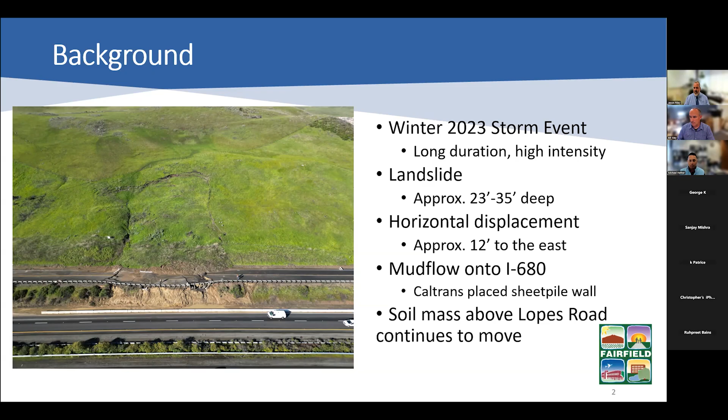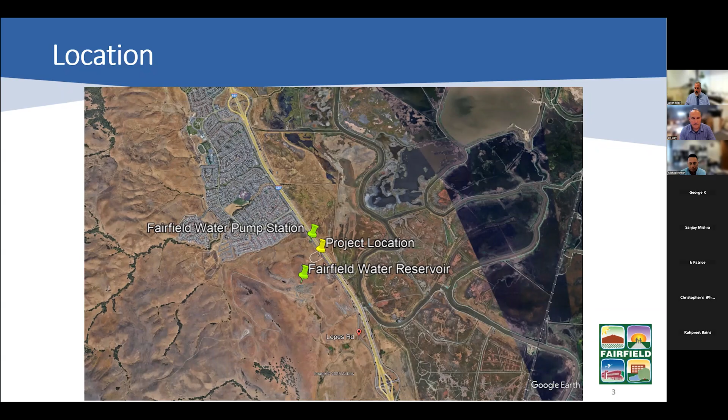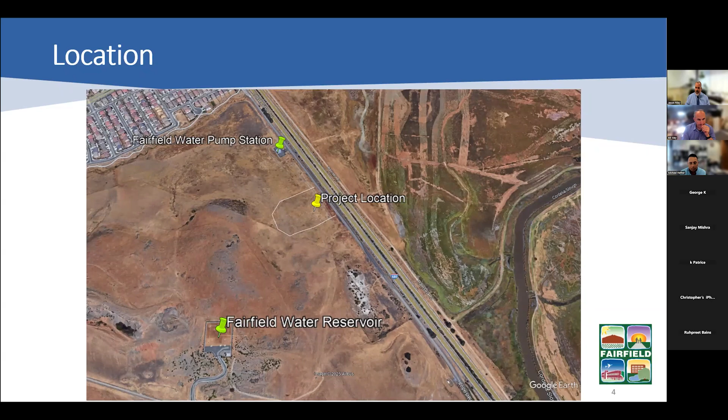So this is just a more zoomed in view of the same aerial, and we can use this to reference during the question and answer period if this might be helpful for your questions to point to certain things.

As far as the damage summary, Fairfield and Benicia both have facilities in that area. Fairfield, the entire project is within the city of Fairfield city limits, so therefore we are leading the project, but we have damage to the roadway, Lopes Road itself. We have that 30-inch potable water line in the area that runs from the pump station to the reservoir, and as you can see in the image on the left, that 30-inch water line has been severed.

This photo was taken as part of our discovery. At the top of that photo, you'll see 3 conduits, and those conduits run communications and electrical between the pump station and the reservoir, and those were also destroyed. During the event, when the wiring was pulled out, it also did damage to the pump station, with the breaker and electrical systems and communication systems in the pump station.

City of Benicia has a 36-inch raw water line that is the primary water source for the entire city of Benicia, and that runs adjacent to Lopes Road. It suffered similar damage.

When that was damaged, just after the event, the city of Benicia installed these bypass lines. If you look at the photo on the top right, you'll see 2 12-inch HDPE plastic pipes, in the street where the roadway used to be. There are also 2 further up the hill, bypassing the landslide area to deliver water to the city of Benicia. So there was a long period of time that the city of Benicia was on water conservation, with an alternative water source that had limited capacity.

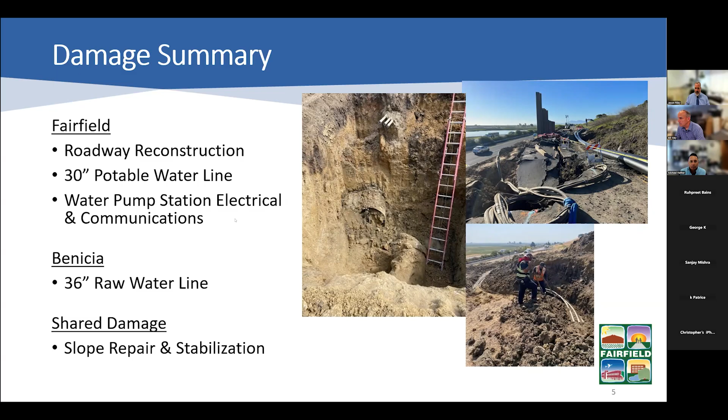As far as project coordination, there are several agencies, federal, state, county, and local, involved in this project, City of Fairfield and City of Benicia. These two agencies have been meeting biweekly pretty much since the project was initiated, and we've been inviting other federal, state, and local agencies: FEMA, the Federal Highway Administration, California Office of Emergency Service (CalOES), Solano County Office of Emergency Service, as well as Caltrans. Caltrans administers the federal funding for FHWA.

Most of the questions we've received for this project are related to the road closure itself. Lopes has been closed, as many of you know, since March of 2023. We understand the public inconvenience this causes. The roadway has remained closed for several reasons.

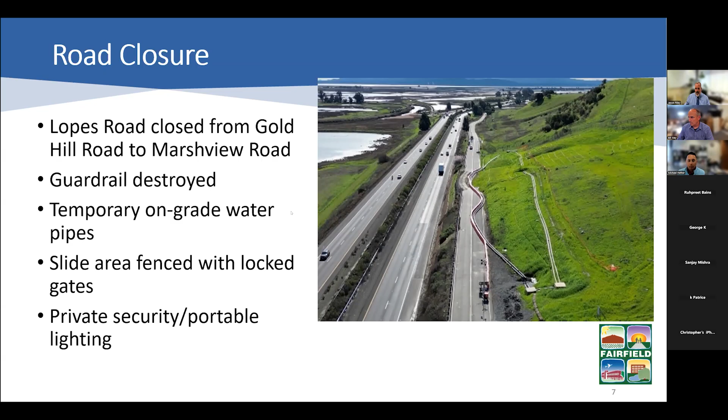Following the event, the cities of Fairfield and Benicia entered into a memorandum of understanding that outlines the responsibilities for each of the agencies. The city of Fairfield is the lead agency since it's within our city limits, for both the design and the construction of the project.

Costs for design and construction are borne by each agency for their portions of work, and then each agency is responsible for seeking their own reimbursements from FEMA, FHWA, Cal OES, or other granting agencies.

For project status, it's important to keep in mind that public assistance funding available from FEMA and FHWA is only reimbursable to reconstruct infrastructure that was already in place, exactly as it existed at the time of the damage.

In August of last year, it was determined that the roadway portion of the work was not eligible for FEMA funding. However, it is eligible for FHWA funding, and that's why we now have a second federal agency involved in the project. The original FEMA cost estimate for the project was $720,000.

Over the last year and a half, we've developed plans and cost estimates around $2.1 million, and we provided that justification to FEMA for consideration. Just recently, I believe in May or June, FEMA has agreed and updated our eligibility for the water component of the work.

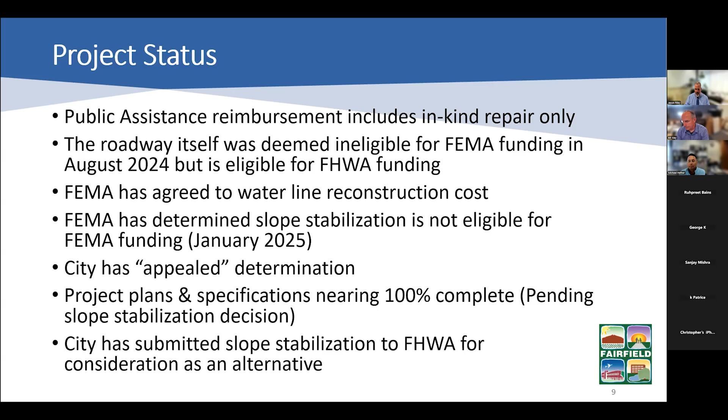This chart provides the preliminary cost estimates between the two agencies broken down by the different types of work. You'll see the roadway construction, the potable water line, slope stabilization, and then our share of the soft costs, which are construction management and design. The city of Fairfield's share is $7.7 million at this point.

And the city of Benicia—their 36-inch raw water line, the slope stabilization and mitigation, and their design and soft costs—their total is approximately $3.8 million. So that's a total project cost of $11.5 million.

So I guess we'll go back real quick. One of the important things is that the potential loss of funding if we were to advance this project ahead of getting obligated by FEMA would be this full amount. That's a very large risk to proceed prior to any approvals by FHWA and FEMA.

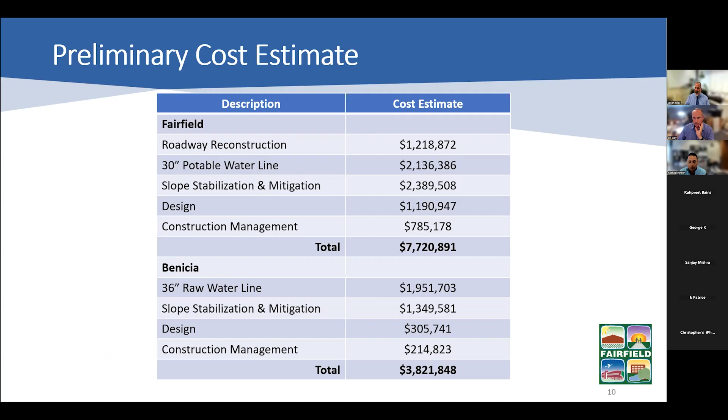The next step is we need to resolve the federal funding for the slope stabilization. We're hoping that can be resolved in September of this year.

The recommended solution is deep soil mixing, which includes drilling into the soil and injecting a cement slurry mixture that'll seep into the soil at 7.5 foot intervals, two rows offset to form a wall, increasing the soil bearing capacity adjacent to the road and keeping that from moving. That would provide the factor of safety for workers trenching the water lines, as well as a more permanent slope stabilization repair in the future.

We'll finalize the plans and specifications by December of this year, advertise and bid the project for construction in January, begin construction in April of next year, and finish construction by the end of calendar year 2026.

These timelines are all contingent on getting resolution on that slope stabilization or determining an alternative solution, which might be a sheet pile wall similar to what Caltrans has installed. Whether we get local or federal funding or not, we may have to work on other grants we've been seeking and looking at, trying to avoid any grant that would be further out into the future and delay the project, but pursue other funding sources available to do that soil stabilization.

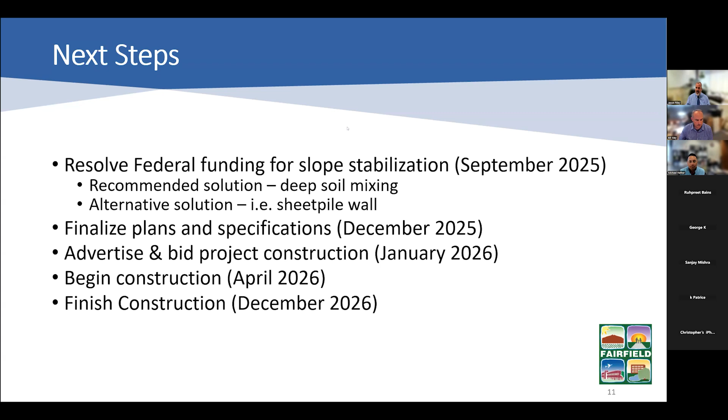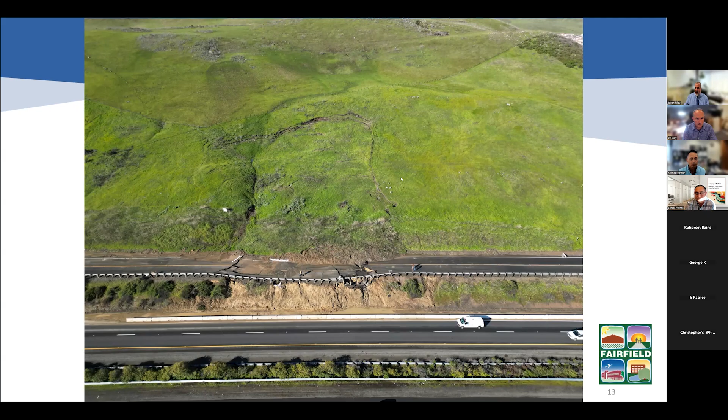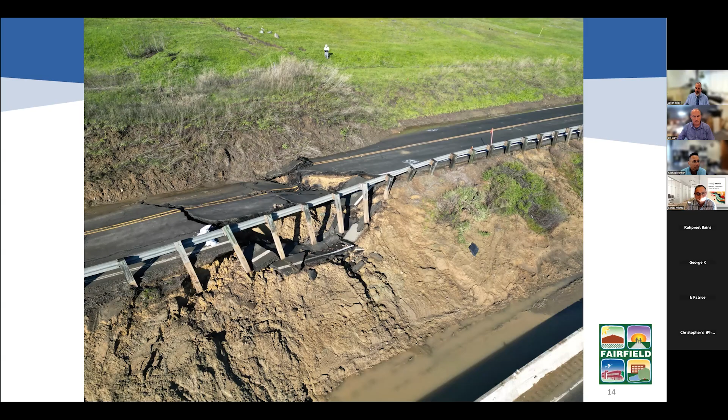Again, this is where the beams for the guardrail have been exposed, fully exposed. You can see the water and mud flow onto 680, the most heavily damaged area. Although you can see the separation in the center line, the stripe on the street here, and this damage extends about 200 feet to the south as well.

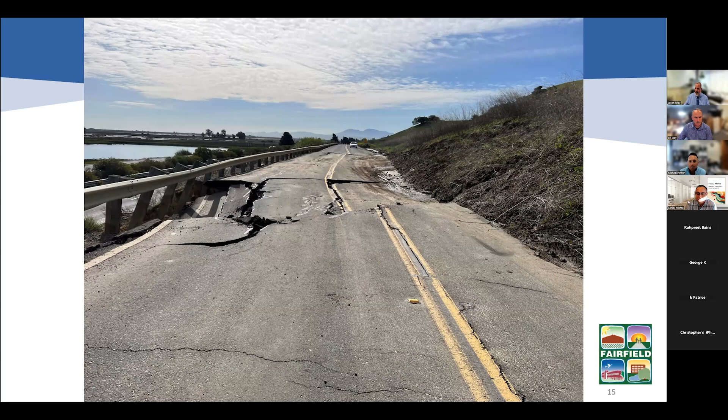Again, just a picture from Lopes Road early on in the slide. And then later in the slide, you can see the guardrail's gone.

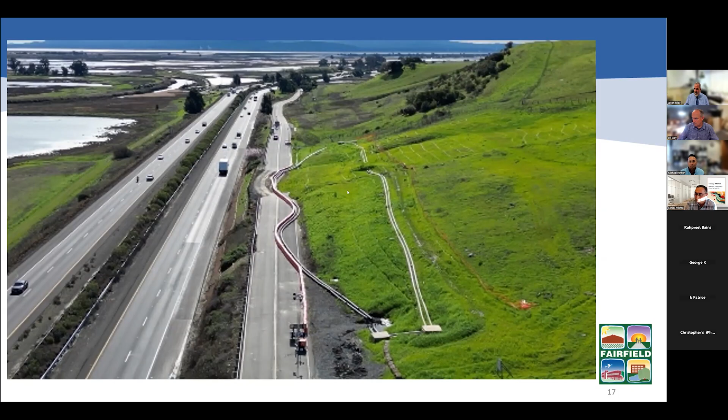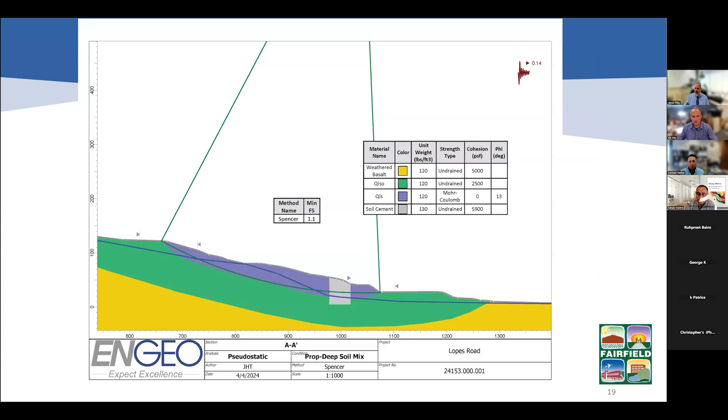So if you have any questions, we're available. The team's here. I'm not sure if anybody from the city of Benicia - I can't see all the faces, but yeah, we're here to answer the questions. So Jason, what I'd like to do is if you could click on the Q&A section first to address the questions that were submitted online during the presentation, and then we could go with any hands raised after that.

Okay, perfect. I'll try to do them in order by the time there. So this slide was progressing for about 3 years with noticeable cracking and movement of the center divider line - this could have been avoided. What efforts will be made in the future to monitor this area going forward to be certain this doesn't happen again? Yes, that's a great point.

And that's one of the reasons that FEMA is questioning whether our slope stability is there. Should you have known that early on - not the same year, but prior to that this was moving? We did not, at least in the engineering department of public works, we were not aware that it was actually moving. As I mentioned, the slope stabilization mitigation method we're proposing will handle this. It has a high factor of safety and significantly increases the protection of the road as well as the water pipes. We are planning to install inclinometers up in the slope to monitor that regularly to avoid the same issue.